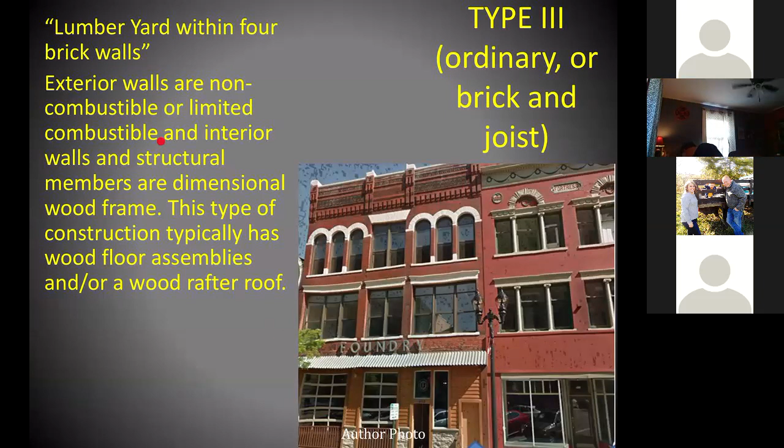So what is a type 3? Basically, we call it ordinary construction. It's a lumber yard within 4 brick walls. We'll talk a little bit about how to identify what is truly type 3 and what might be wood frame type 5 with just a brick facade. But this is your main street, your downtown building. The exterior walls are non-combustible or limited combustible, and in interior walls, everything else is wood.

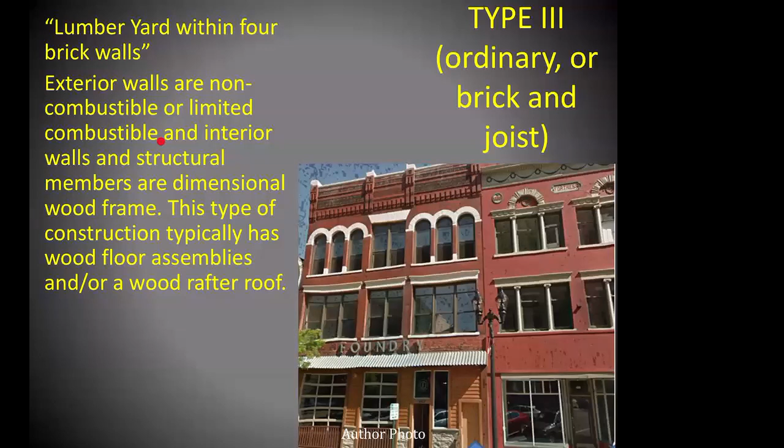And the floors are wood, the rafters are wood, and fires in these buildings. The biggest thing, if you don't remember anything else tonight, I want you to always think about being able to forecast ahead of the fire. It is paramount that you think where the fire will be in 5 minutes, 10 minutes, 15 minutes, because that's where cities fail, fire chiefs fail, command officers fail, and that's when we start burning down blocks of these buildings.

Once again, I have this in every slide presentation I do. 3 books that you need to have: Brannigan's Building Construction for the Fire Service, the 6th edition is now out, Collapse of Burning Buildings by Vinnie Dunn, and The Firefighter's Battle Space by Vinnie Dunn.

3 excellent books that everyone watching this needs to have. Brannigan's Building Construction, this 6th edition, I may have mentioned this in my previous webinar with you guys, but if you didn't see that one, you're new to this one. The 6th edition is broken down by sections. You get yourself some sticky notes and you find out what you have in your town from this book, and you just put those sticky notes in those sections and you read those sections.

If you don't have type 4 heavy timber, then don't read it in Brannigan's Building Construction. Focus on what you have, but this book breaks it down so you can easily go back and review and read. So these 3 books are a must, and they're a must if you want to understand the type 3 ordinary constructed building.

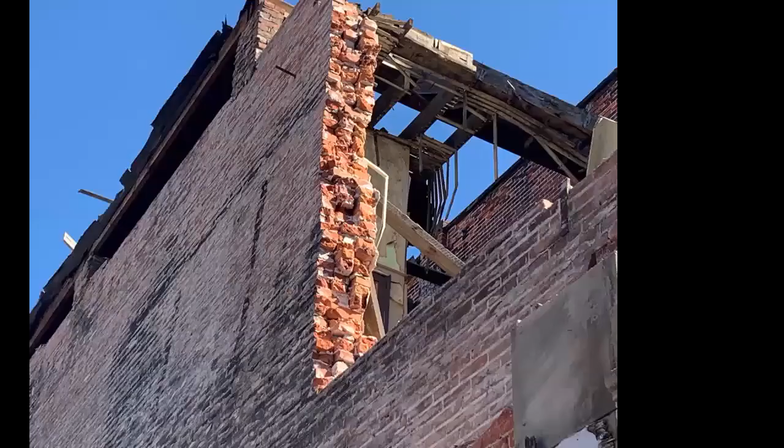Perfect example here. This is a cutout in my town of a building they were tearing down in my downtown. This is a perfect example of the bricks. We'll talk a little bit more about how they are laid out, but this is just I thought was a good picture of what we would call the wythe. That is the rows of bricks that make up these buildings.

Big thing to remember. We are looking at buildings that are 100, 130, 120 years old. They are, and we joke, but it's true, the only thing that's holding up these buildings is gravity. You know, these buildings are 100 years old, but their wood is very substantial because of the lumber that was utilized in these buildings. If you're tuned in and you don't have any type 3, hey, great. And like we talked earlier, you would respond mutual aid to those kind.

But if you protect a rich suburb that is nothing but type 2 buildings, you protect cheap throwaway crap buildings. And that's just the way it is. So my point is that in a type 2 or a wood frame building, type 5 with trusses and modern furnished materials, they're going to collapse. Your fire ground commanders and firefighters and officers, you pretty much go into that mindset that if we can't lick this thing in the first couple minutes and it's a one-line fire, if it gets beyond that, we're backing out, we're throwing big streams, and the thing collapses.

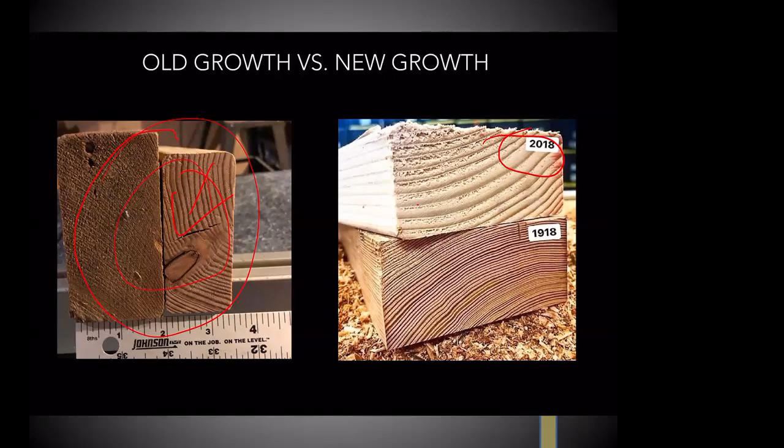You have to understand the skeletons that you're going into. It will allow you to work. It will allow you to lay lines and fight fire, what we all want to do. These fires, if you get in on these, are the ones that you all dream of, multiple masks or cylinders. You're working hard, smoke. It's what we all signed up for. But if you don't do it correctly and it gets away from you, then, like I said, you got trouble.

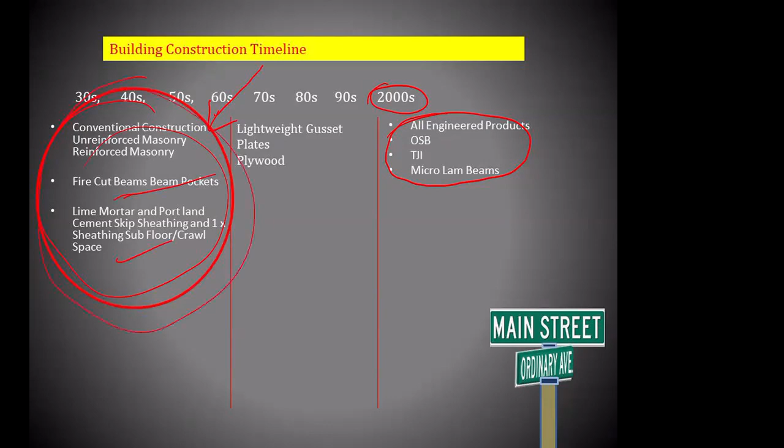So the exterior optics of these type 3 buildings. We're going to talk about 5. There are many things, but I'm going to review, and if it's something new, great. Any of these things that you haven't seen or heard of, share it with your other firefighters, because these are all things that are going to make or break your success on your main street. But we're going to talk about these exterior optics. The year built, block inscription, that tells you a lot.

If Bill Smith builds a Wendy's in your town, and he builds it in 2020, Bill Smith isn't going to put on that Wendy's "Smith 2020." What a lot of these builders, these architects and contractors, or the people that owned the buildings did 100, 120 years ago, at the top of the parapet wall or somewhere on the building, they would put the year it was built. That will tell you a lot about what might be holding up that building, and we'll get into that.

There's one year you need to remember that will really lead you on your way to understand what's holding that up. And again, we'll talk about it. We'll talk about the King's Row and the header rows, how to tell if it's a true masonry building or if it's wood frame with a brick facade. The parapet wall. We'll talk about canopies, awnings, and signs, and fire escapes.

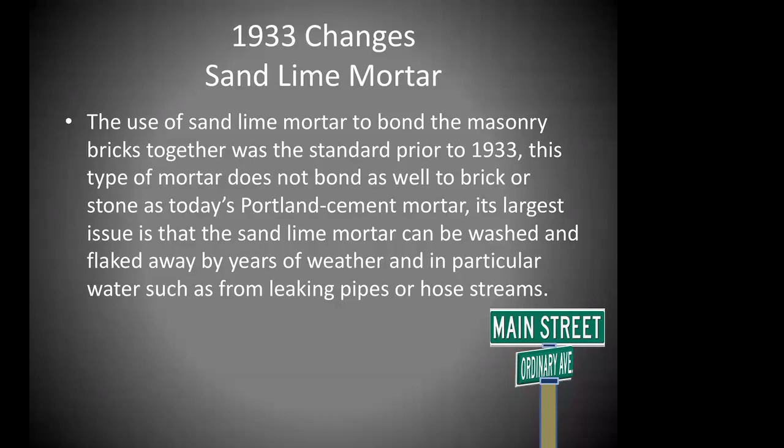So this earthquake went through in '33 and did all this damage. One of the things they found was that the mortar holding the masonry wasn't good enough. So out of that, they came away with a better cement, a bonding agent for the mortar. Here's a good example of a building in my town where we threw an aerial bucket up, and this building was built in the late 1800s.

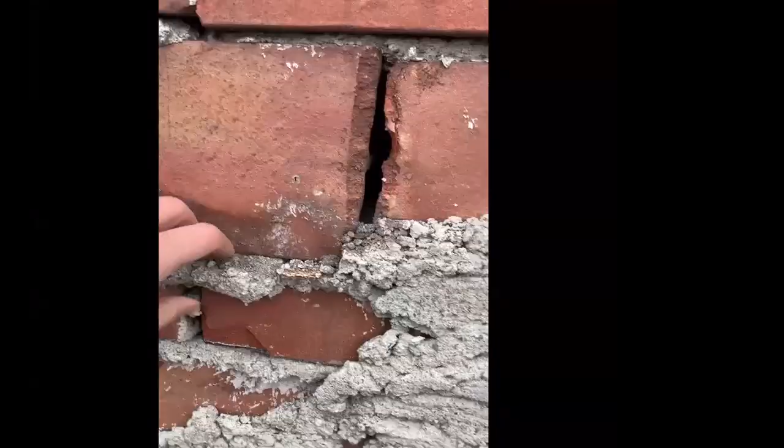Now, don't tell anybody in my town that an assistant chief's going up in a bucket and peeling away mortar. But if I can do that with my hand, what do you think your streams will do? And so, again, 1933, that's the key. This building was built in the late 1800s, sand lime mortar. You're able to pick that clean, the mortar between the bricks.

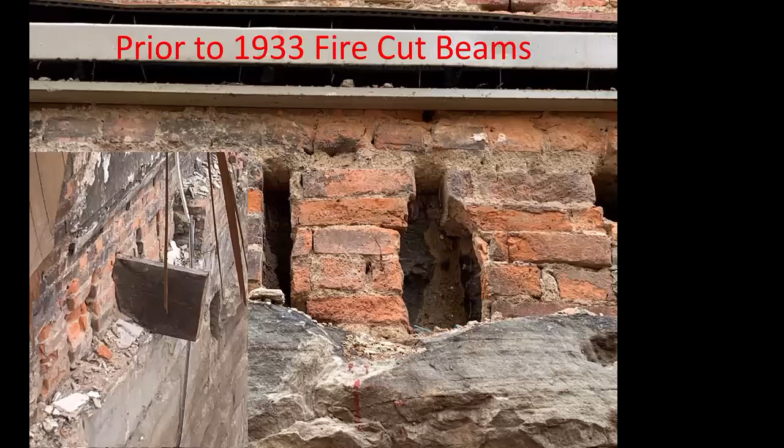Prior to 1933, also, the rafters, fire cut beams. As you can see, these are called lets, and they're just basically a pocket. So when they built these buildings, they would put the rafters on an angle in these. Fire cut beams are designed to release the building inward in the event of a fire.

So fire cut beams were designed so that if you were to have a fire, as you think of the A, B, C, and D sides, the bearing walls for most of your downtown type buildings are going to be Bravo and Delta. And these fire cut beams allowed, prior to '33, that when they would have a conflagration or a fire, these fire cut beams would release and everything would collapse inward.

So it saved the walls. So then basically all they had to do was scrape up the innards and rebuild, and they still had the 4 walls. And so if a building's built before '33, those fire cut beams aren't going away. This was a building that was taken down in my downtown earlier this year, and we got in there and were able to look at some of the lets and the fire cut beams as they were taking it apart.

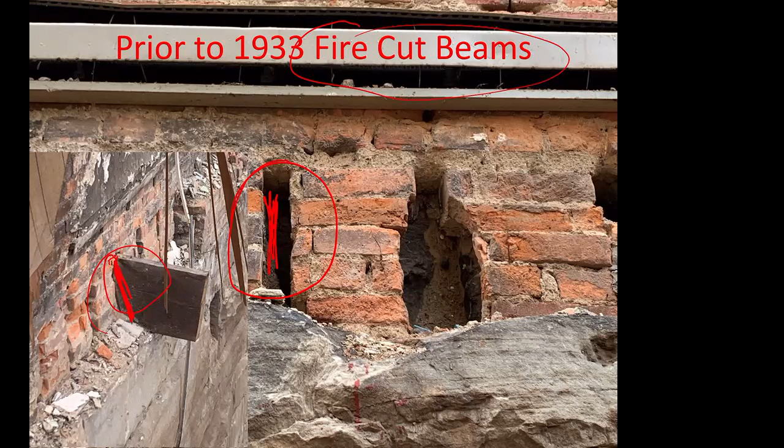The King's Row or Header Row. So I challenge you, when you get a new firefighter, some of you watching this may already know this, that's great. But I challenge you to leave your department better than what you found it. When you have a new firefighter, this 21-year-old kid who just comes on the job, or if you're a young member of the department watching this, I applaud you, but you're trying to learn. Firefighters just don't come on your job and know everything.

You have to take them to these buildings and explain: is this a true brick masonry building, or is this a wood frame building with a brick facade? And you can identify these quickly by the King's row or what's called the header row. When you look at a building, you'll notice that maybe every 6 or 7 rows of brick, you'll see a course turned. In this cutaway, it's turned and it brings the rows or the widths of the bricks together.

Remember, these buildings were not built with any kind of rebar. Prior to 1933, there wasn't much rebar used to add support to the brick. They're not using this type of brick to build an O'Reilly's auto parts store in your town. They're using block, a concrete masonry unit or CMU, and probably some rebar. But they didn't have that then. So in order to get the building's walls to adhere, they would have to turn a row.

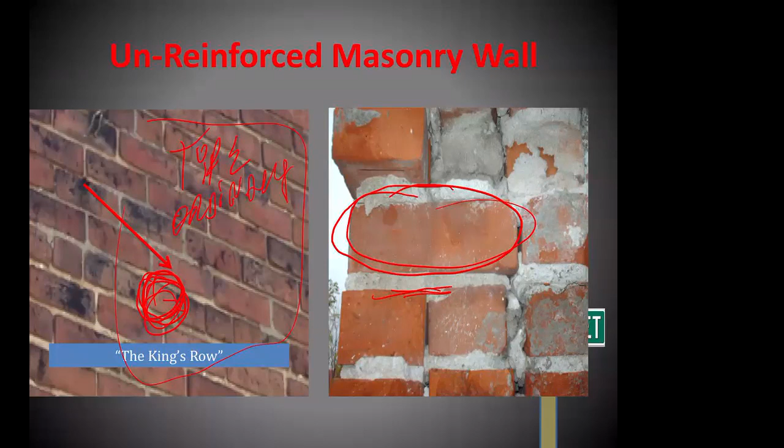So when you see a row turned, that's a very good indication that it's a true type 3 ordinary construction, and you're not going to have a wood wall behind this with just a single row of brick. Now, some people say, well, in my town they're building a building and they're making a header. If you're watching them build a building in 2020 and you see that, it's fake. But if you go downtown to a group of buildings built 100, 120 years ago and you see that, that ain't fake. It's an unreinforced masonry wall, tied in like that, and it's true type 3.

Here's another one in my downtown. There's no header course. This building was built in the late 1870s or 1880s, I believe, and it was just a wood frame building, and they just threw up some brick. So why is that important? Well, if it collapses, we may have a curtain wall type collapse, where it's like you cut a curtain and it just falls to the ground. Again, we can't predict totally how a wall will come down, but you should have a good idea.

If you don't have any courses turned, it's a brick facade over a wood frame building. As things freeze and thaw here over the year, these will expand out, and you can have problems that way too. Not only in these types of buildings, but also in your true Type 3, especially up in our area. My town has a street that is totally blocked off, an alley, because the bricks are falling, not because I went up in an aerial and pulled the mortar off, but the bricks are falling into the alley from an almost 1890 building, and the bricks are starting to fall off.

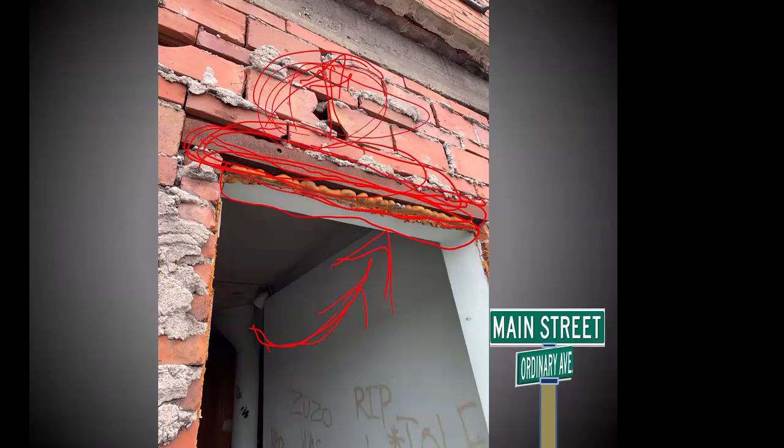Fire comes blowing out of these windows. It's heating up that metal. And we all know that metal is going to turn and twist and elongate. There's nothing else holding up these bricks above. So when you have heavy fire conditions blowing out a window in these buildings for a long period of time, always remember that you probably have a metal lintel above that is going to twist and turn and could bring down those bricks. Just something else to think about in your downtown.

The parapet wall. What is it hiding? Here's another thing about the parapet wall. Prior to 1933, before that earthquake, you could build a parapet as high as you wanted. It didn't matter. Here's a good example. This building was built in my downtown in the late 1800s, and this parapet wall, it's kind of hard to see, it's ginormous. It goes as high as you want it. After '33, there were some parameters put on the height of the wall. So if you have real high parapet walls, you could pretty much guess that that's a pre-1933 building.

Another thing that comes with these is that if they don't put any kind of coating, wainscoting, or coverage to protect these bricks, wind, rain, freezing temperatures, freeze-thaw periods, there's nothing protecting these bricks. If they don't do that on the parapet wall, so this was a good example that I had, I took one of my firemen up on one of my downtown buildings. Here you have this protected, that's great. But where it's not protected, he's able to pull that brick right on out of that parapet.

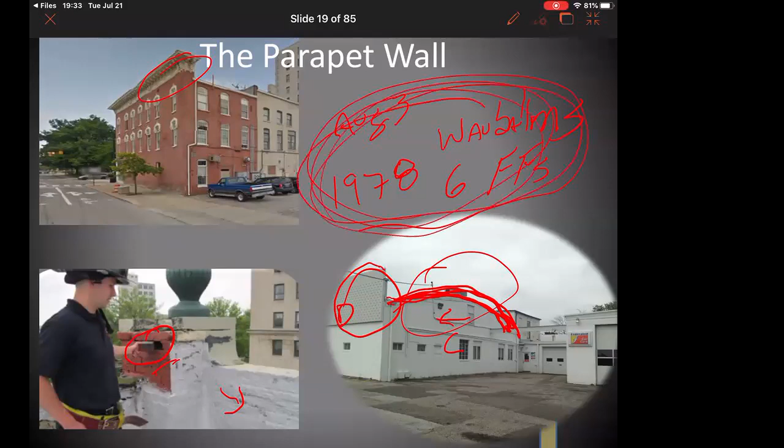If you're unfamiliar and want more info, write this down on your phones: 1978, we're coming up on the anniversary, August 3rd, Waldbaum's, New York City. I'm not a good speller - Waldbaum's supermarket. Killed 6 firefighters. Bowstring truss, another thing called a rain roof, which we'll talk about. But if you're unfamiliar, 1978, Waldbaum's fire, New York City. It's an event that we should all know about and know the lessons.

Parapet wall collapse. Guys and gals listening to this, watching this, brothers and sisters, I can't overemphasize - when I study these fires, and again, I study them all over the country, one of the things is because we do bread and butter house fires, we're not used to parapet walls and their collapse. The parapet wall is the most unstable wall of these buildings.

A parapet wall is the wall that just extends out above the roof line, if you would, on either the front or back or all 4 sides. It's exposed on the back side, but these buildings will all have some sort of parapet wall. And again, based on that 1933 date, you'll know how high or how low they are. They can collapse very quickly, and we'll talk about how they collapse here in a second. If you're underneath that, you're gonna get hurt.

Most parapets, just like that lintel above a window, you're going to have an I-beam that supports the parapet. We all know when that metal heats, it expands. If you have heavy fire conditions, this is going to heat up and expand, and it's going to bring down the parapet wall. Plus, if this backside is unprotected - there's no wainscoting, no covering, no protective covering - you just have masonry brick, over time, freezing and thawing, and this is going to expand. If it's built before 1933, you're going to have that sand lime mortar, and this will be the first thing that's coming down on top of your head.

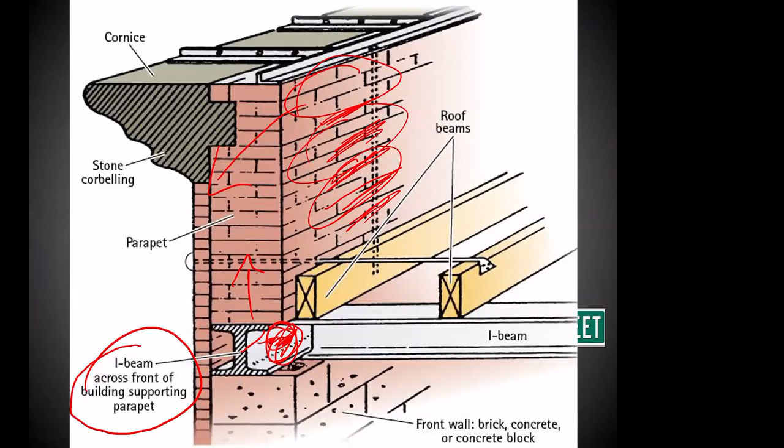Here's a fire that took place last year or earlier this year in Indianapolis. A 1-story building. Now again, this was a perfect example - that heat just twists that, and that parapet's coming down. Let me see if I can get that in slow motion.

Another good example - this was a fire that took place in Massachusetts, Fall River. We have a 1-story building, and you have this facade and this parapet wall. When you have a 1-story building, you will for sure have some sort of I-beam that runs this way to hold this up. You have these showroom windows, and with heavy fire conditions or any kind of fire in any void space above, in the drops above the drop ceiling, it's going to heat up and come down, which is what happened here. This is that building.

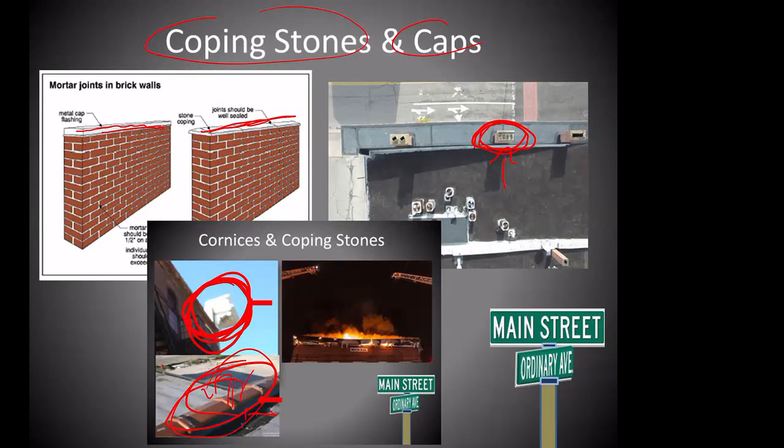More hazards: cornices. That is nothing but hollow wood in a lot of buildings. They're very elaborate, but all it is is one more area for fire travel. How do you know? Well, you've got to get up and look at them.

Again, not much holding these on. You can see this building was built in 1895. Here's another shot of one of my buildings—you can see the deterioration. This is the alley they blocked off below this, but you can see a lot of the masonry and mortar has been washed away from this cornice. Another shot of a cornice just showing how hollow these are. Nothing holding them up, a lot of fire travel, and that can just peel off on top of your head.

Fire escapes. The people living in this building in my town wish this was cannabis and not ivy. But fire escapes are one of the last things that a landlord will fix. They cost a lot of money.

State of Ohio, and probably most states, if you can't take the fire escape off—if you take a fire escape off, you've got to put one on. So these are expensive, and they're one of the last things a landlord will fix. Well, you need to get out and look at these, because if they're not fixing them, are you going to trust your people on them?

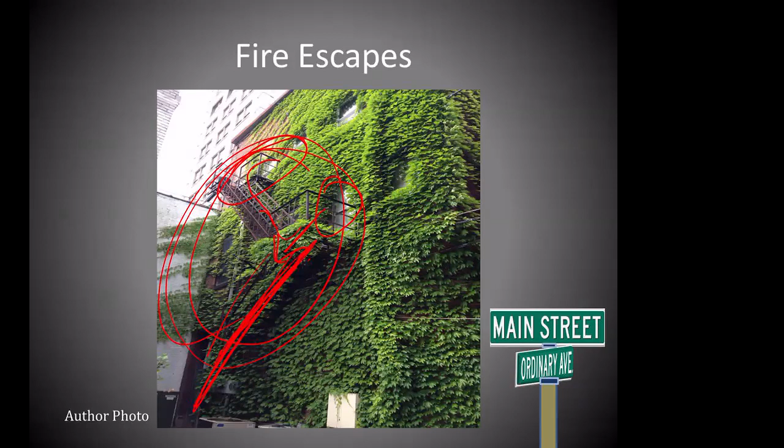A good example of a failure of one: this picture won a Pulitzer or something in the photography world of newspapers. In 1975, you can see this firefighter—they put the aerial up. He has mom, and mom has the child. This collapsed, and he was able to grab onto the aerial, but the mother passed away, and the child survived because she fell on top of her mother. Just a tragedy, but a good example of fire escapes and their failure.

All right, we're going to go inside now. What do you have above? Do you have a bar? Do you have single room occupancies? The fire—if anybody here is from Lima Fire, the fire you had in your downtown a month or so ago—I understand there was concern about homeless people living in there. I want to talk about that fire a little later, but what do you have?

I've got some single room occupancies, junk, a collection of just stuff, a bar. What do you have in your downtown buildings now? I guarantee you when these were built, it was for hardware stores, florist shops, everything. Over time, it wasn't made to be maybe a florist on the first floor with a dentist or lawyer's offices above. Well, now it's a dollar store full of plastics on the first floor, and the second and third floors are vacant. You have to identify what you have, and you have to get into these buildings yearly.

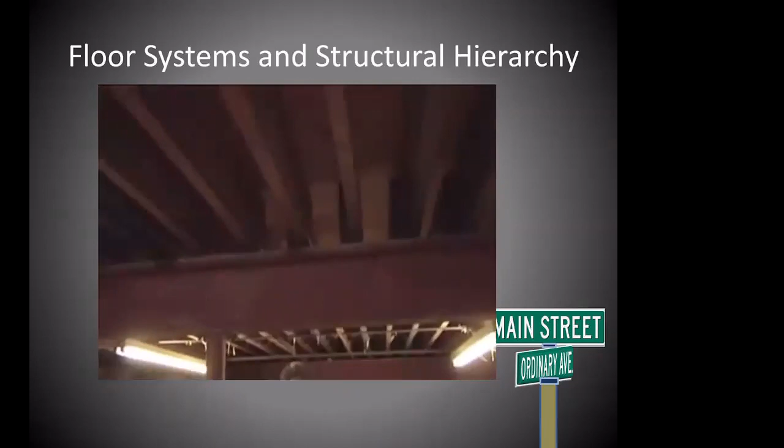Back to our column: if our column were to fail, it would result in the loss of support to the beam. The beam may also fail, dropping the floor joists which are supported by the beam, resulting in a large area of collapse.

If this column line runs vertically through the building and supports subsequent floors and the roof, the loss of a column in a basement or lower level will result in a vertical collapse sequence through the building to the floors above and to the roof, resulting not only in a large horizontal collapse zone, but a collapse zone that encompasses all floors of the building above the failed column.

The building we're in is an old supermarket. The portion we're standing in was constructed in the 1970s. Notice the floor joists are large dimensional lumber, actually 3x12 floor joists. They've been constructed in a manner designed to support a heavy load above, and the joists are 12 inches on center compared to the normal framing standard of 16 inches on center.

What that does is allow for a greater load. For the fire service, that means there's more meat in the floor joist, which translates to greater burn time. The fact that the joists are 12 inches on center also builds redundancy into the floor system. We could have a localized area of collapse or damage to several joists, but because the joists are redundant, one will help take up the load of the adjoining joists should they fail.

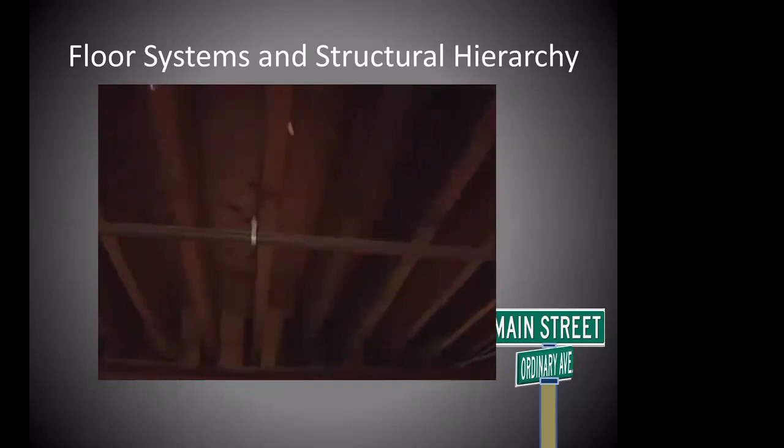Another collapse potential in this building is burn through of the floor decking. What we see when we look up between...

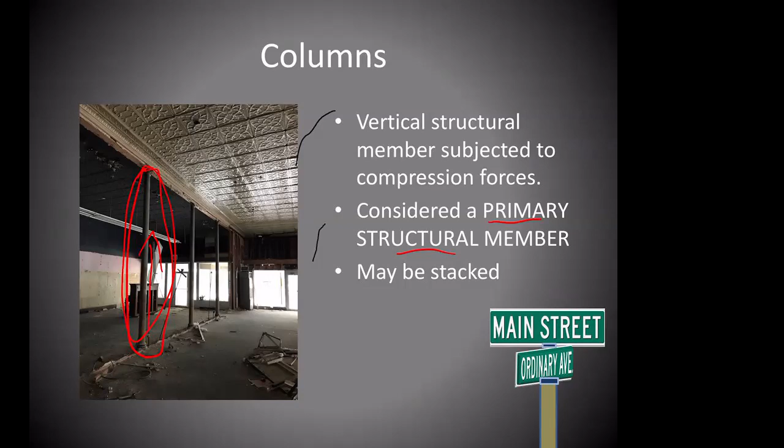So he talks about columns. They're going to be stacked—they're a primary structural member. How are they protected in your buildings? A lot of times they may be boxed in. If they are, that's great, but it also creates a channel for fire, another void. You need to see how your columns are. Good example of different types of columns.

How do they react in compression, their strength as far as buckling and shear. One of the things we'll talk about—this slide is kind of out of sequence, I apologize—but cast iron.

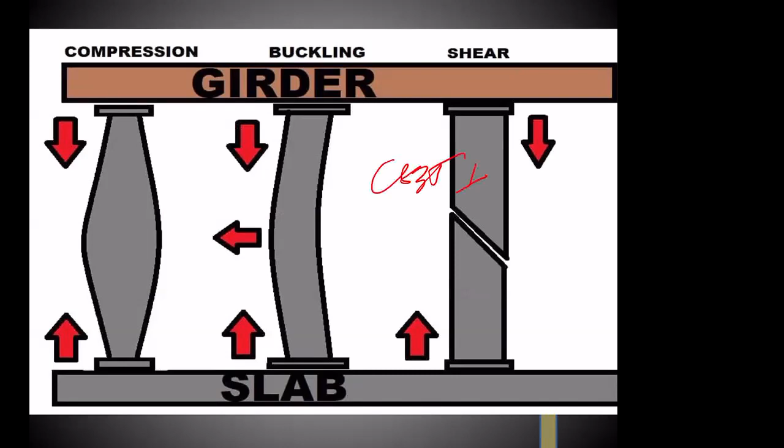Cast iron was very popular after the Civil War until the early 1900s. So if you have a building downtown built in the late 1800s, chances are it's going to have cast iron. What makes cast iron so bad—some say it's brittle, or that applying water makes it shatter. No, it doesn't have the same kind of shear strength. It's very good in compression, but any kind of shifting will cause that cast iron to move. That's the true issue with cast iron.

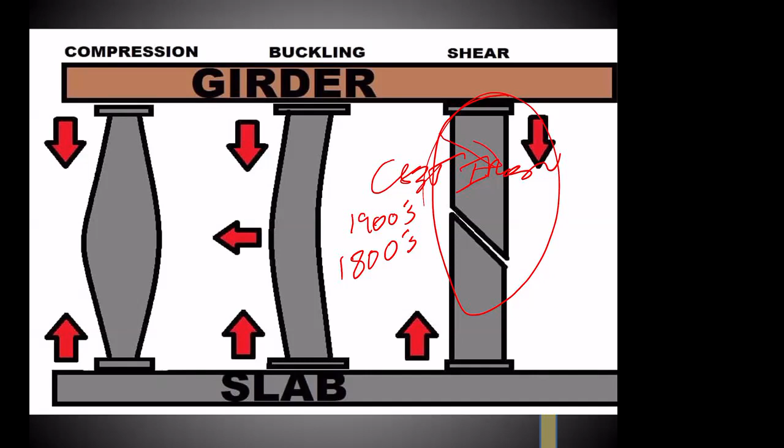Plus one other thing I'll show you here—right there is how thin it could be. This is from, I believe, Lex Shady, who sent this in about how thin cast iron is, so I want to thank her for this. You can see how thin that is.

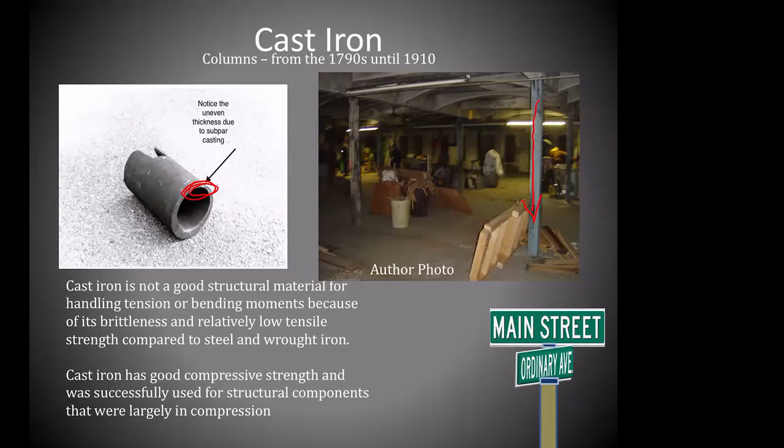Again, in compression this is good, but because it's so thin, any kind of shear could bring down that column. Cast iron dates from the 1790s to 1910—boy, if you've got a building that far back, God bless you. But if you have anything standing from after the Civil War, you may have some cast iron.

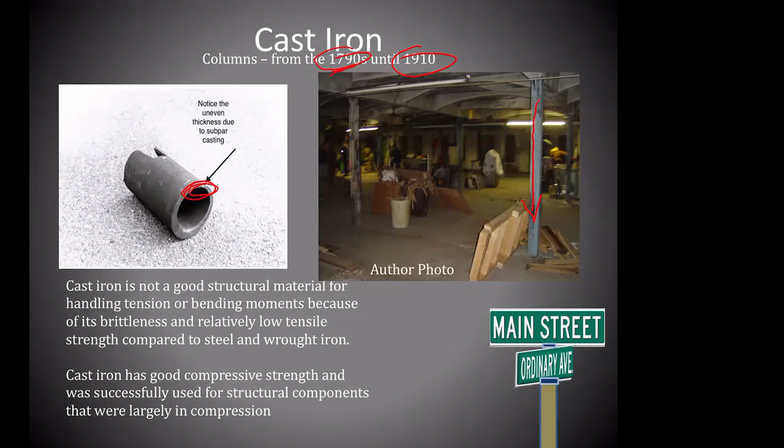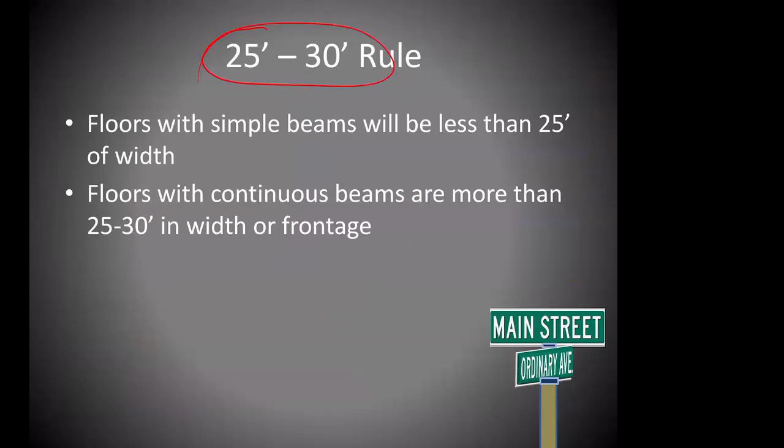The 25-30 rule—a very simple thing to always keep in mind. You see a column that's 25 feet.

Sorry about that, I got a guy sending me cool fire pictures.

25 feet—so if you look all the way across, you can pretty much tell. That's a safety thing too, as you're moving in with hose lengths or whatever, because they couldn't have these long rafters—they needed to put a column in to support the load. They couldn't just make one giant rafter. This was before the days of trusses. That's why when you go to Walmart, where trusses came into play, you could have these wide open spaces. You couldn't do that in the late 1800s or early 1900s.

They were limited, so they would put a column in every 25 or 30 feet. This gives you a good idea of how long or wide a building is. Give it a shot—grab a tape measure, go out there, look at your columns in these buildings, measure off and see. It's a good rule of thumb.

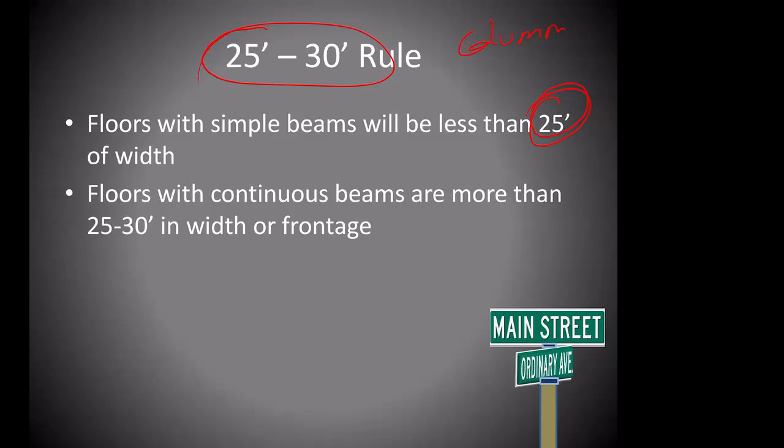Are your joists exposed or covered? If they're open, they have very little time. This is one NFPA item to consider: open joist type 3, 200 and 211. The first number is the hour fire resistance of the exterior walls—so 2 hours on that masonry. The columns, if open, you've got nothing; if covered, you've got an hour. Same with the interior walls—if covered, you've got an hour.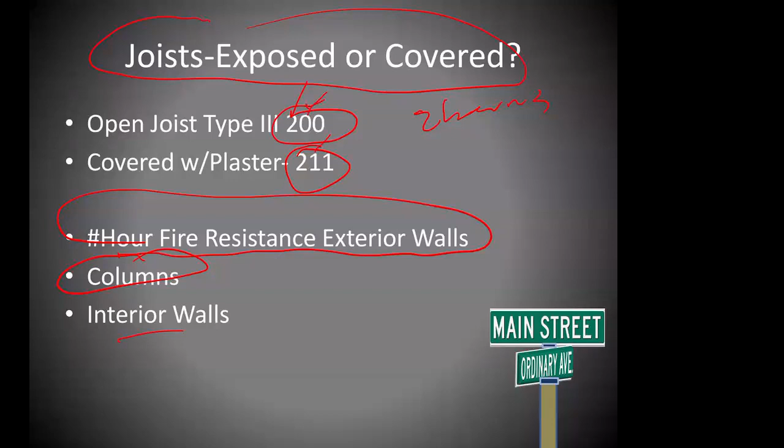Most basements, wide open, uncovered. All right, not much time. Inside walls, this is what is going to get us and why we lose blocks. You can go into a house fire and you can pull walls until your heart's content. Open them up, chasing fire. Everybody's excited, working, blah, blah, blah.

Okay. You get into your main street and you go, we got to open this wall up. Okay. Give that a couple, I don't care how many giant tires you flip or how strong you might be. In a smoke condition with SCBAs, these are going to wear out crews trying to open up. Very difficult. So you have to remind your crews that they're not opening up drywall that they would have in a normal house fire, or even lath and plaster of a residential dwelling.

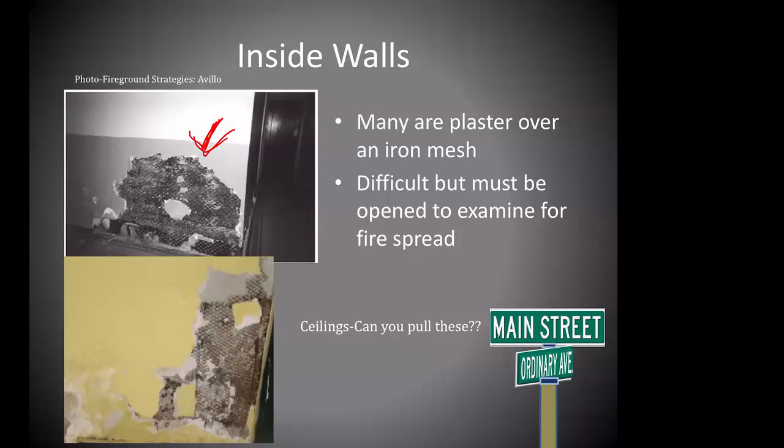Hopefully, if you have lath and plaster in these ordinary type 3 buildings, great. But some, you may have this plaster with that mesh. It's going to be difficult. We'll talk about ceilings here in a second. Excuse me.

We're going to get into basements, but a lot of buildings, when you see this, drugstores. A lot of drugstores, this building ain't a drugstore. If you still got a drugstore that's been in your downtown for 100 years, I want to meet those owners and know how they've stayed in business.

But if you know that a building housed a drugstore, the flooring may be terrazzo. And terrazzo is basically these polished pieces of marble and cement laid over wood. Very common in drugstores. Insulates fire below very well. And we'll talk about an event.

Have you looked at those with a thermal imager? Yeah, you're not going to be able to. Forget it. Is there a reflection? No, I don't believe there's a reflection, but you will not see anything.

Zero. So if you have a drugstore, and not just drugstores, churches, that should raise a flag. Drugstores were very prominent on main streets many moons ago. The flooring hasn't really gone anywhere. So just check that out. Now we have all kinds of products, things that this building was not meant to house. And so you have to look in your interiors on what you have, what kind of products you have.

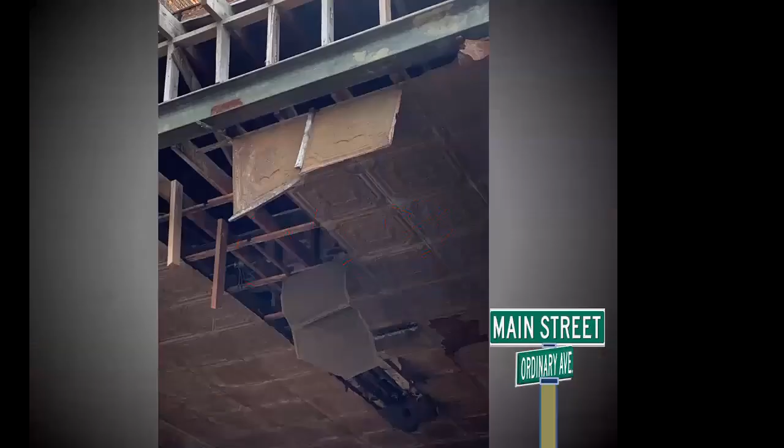Tin ceilings. Another interior item that if any of you have studied for a promotional exam, I've studied for promotional exams, I've taken a ton of them. And one of the things it says in a very popular textbook, John Norman's Fire Officer's Handbook of Tactics or Avillo's Fireground Strategies, they talk about how to open a tin ceiling. You know what? Good luck. God bless you. In those cities that they worked in and they wrote, you got 30 to 40 to 50 firemen pulling.

Don't think that a crew of 3 going in to check for fire is going to be able to pull a tin ceiling. Find another avenue, but you can forget being effective at pulling a tin ceiling if you don't have the staffing. If you do, hey, go for it. But I don't know, let's say again in Lima, how many firefighters they can get on scene in a downtown building fire within the first half hour. But in my town, you're not going to get the same as what you would get in FDNY or where Avillo was at in Jersey.

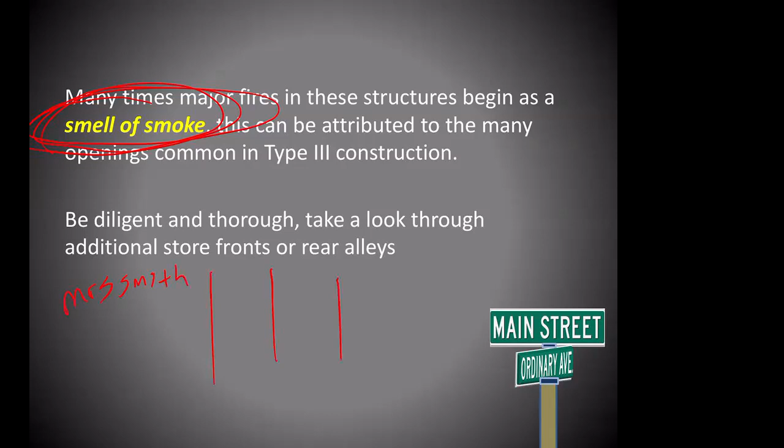And you go, and you see Mrs. Smith, and you go, yeah, it smells a little bit, but we can't find anything. And we checked with our fancy thermal imager, and you're okay, Mrs. Smith. If it gets worse, call us back. Well, as you return, turn the corners, drive down the block, take a look in the windows and see. I'm not saying you got to force every door in the block, but take a look, because let's say Mrs. Smith is here. And you got a basement cooking down the block. She'll smell it because of the voids. We'll talk through basements here in a second.

So be diligent. This bit us a long time ago in the city of Elyria. But when you have a smell and you're going home, tell your driver, you know what, let's go down the alley. Let's turn around and just take a drive back. Turn on those fancy quartz lights on the side of your pumper and shine up the building. And you might see something. You might pick something up.

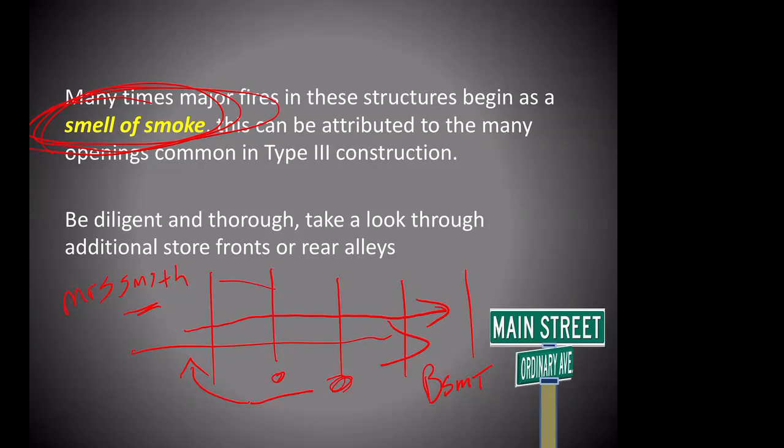Potty problems. You got fires in these bathrooms, red flag. Or you're going in to look in these bathrooms. Rotten wood. The chases are going to be exposed. You might have large bathtubs, if these were made as apartments 100 years ago. You might have a lot of old cast iron. Today apartments are built, think about how many multi-story buildings you have. They're probably just garden apartments, okay? And everything is stacked. Well, that's PVC pipe. They're made with PVC because that way they're not going to rot, they're not going to have a hole in there per se, and you don't have to have as much maintenance.

When you build a building in the 1800s, early 1900s, and it's 3 floors, you're going to have cast iron plumbing, and let's say they have a hole in it. So they go in, they patch it, and make more voids. Just something to think about. Be cautious when you're working in the potties. Don't stack 100 people in a bathroom in one of these buildings checking for fire.

Basements. If you're still with me, and I hope it's not just me talking, but if you're still with me, basements. Listen, think about this.

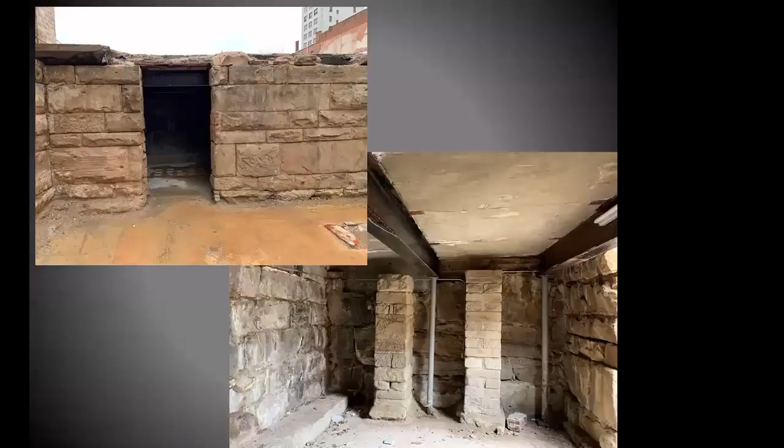A lot of these downtown buildings will go underneath the sidewalk. So in my town, they tore this down earlier this month. I was able to get in there, and this is coming in from the basement, but you got a whole room here. So if you look in your downtowns, you start walking towards the A side, you may find a door or doorway that's getting out underneath the street. Just something else to look for.

Okay. Another item that will help you vent and get water. It's called a showroom bump out. These buildings were built as a store, okay, mercantile. Every Christmas, there's that movie, Red Ryder BB Gun, A Christmas Story. They all got their faces pressed against the showroom window. Okay, when they built these, the showrooms were built not for the weight of people, but for maybe a mannequin or clothing or what they sold. Flimsy wood, like a stage.

You might have very good access directly into your basement through the showroom bump out. So you would be able to take these windows and possibly, the only way you'll know is getting inside and getting down into these buildings. But if you go down and get into these buildings and you walk towards the A side, look up. And if you see a change in grade in that floor to where it's flat and then it maybe goes up a little bit, the showroom bump out. That's easy access. It's flimsy because it wasn't designed for people to walk on. You might have good access. Showroom bump out.

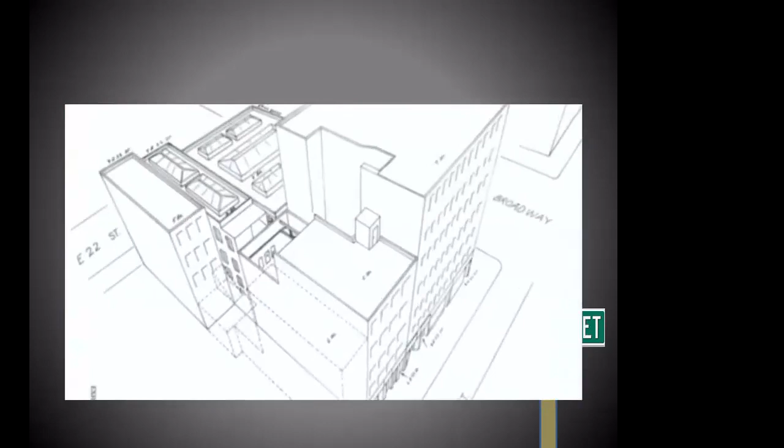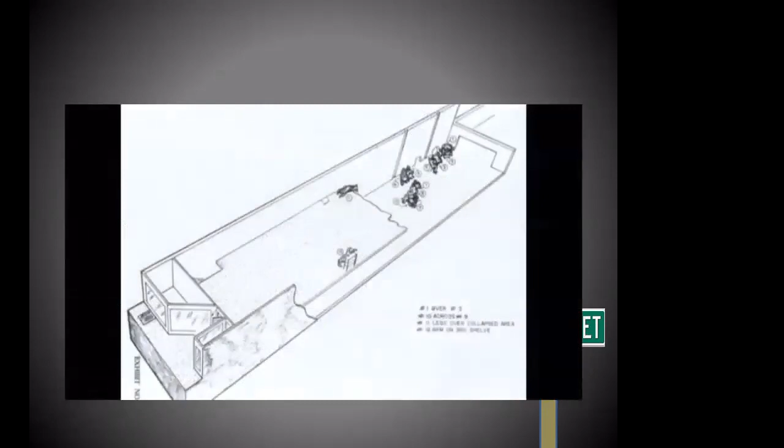What happened was the man who owned the building on 22nd Street was an art dealer. He had drums of lacquer and thinner down in the basement. Business was very good, so they knocked down the original bearing wall that was in the middle between the two buildings and extended a new brick cinder block bearing wall 35 feet into the cellar of the building on 23rd Street. So when the fire occurred down there, it destroyed the wooden beams of the building on 23rd Street.

When Chief Reilly and Jack Finley and Joe Priore and 18 Engine and 7 Truck went in to check the smoke around the baseboard that the fire patrolman told them about, they actually went in past the new dividing cinder block wall and were now standing on a terrazzo floor.

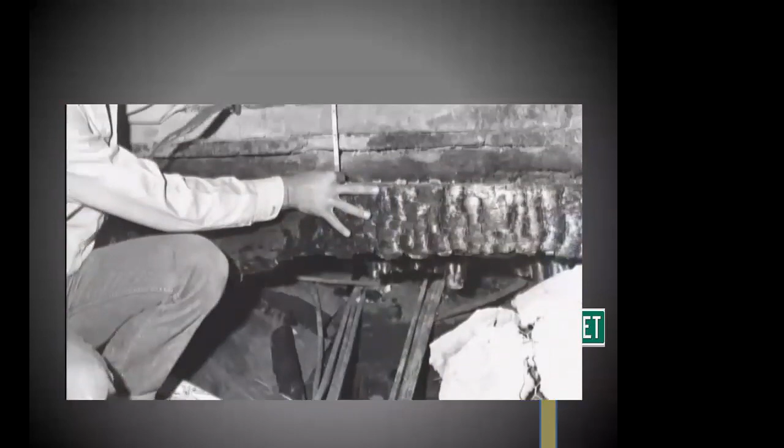Terrazzo is polished marble chips set in the floor. So you had 5 inches of concrete, and what the terrazzo floor did was conceal the weakness of the floor and insulate the heat of the fire. So they could not sense the heat through the concrete, and they could not sense the weakness of the burned away wooden floor beams.

And when I saw the terrazzo floor collapse, which is very unusual, it was a chunk of floor that just went into the basement, crushed those drums of varnish and lacquer, and created a flammable gas ball of fire that roared out through the Wonder Drugstore.

Well, first of all, you had so much water. We had the super pump operating, and we had even 2.5-inch hose lines running for hours. So those basements were filled with water. When you go through one building, it's at least 8 to 12 inches of brick, then you've got to go through the foundation wall of the adjoining building, another 8 to 12 inches of brick.

So they would hoist up the jackhammer to try to take it off. You'd have to jackhammer your way through some bricks, and then they'd come in with the battering ram and try to expand the hole. It was a labor-intensive, long period of time.

And then, I was not down there, but when they got through that opening, they had to go in and find those bodies, what was left of them.

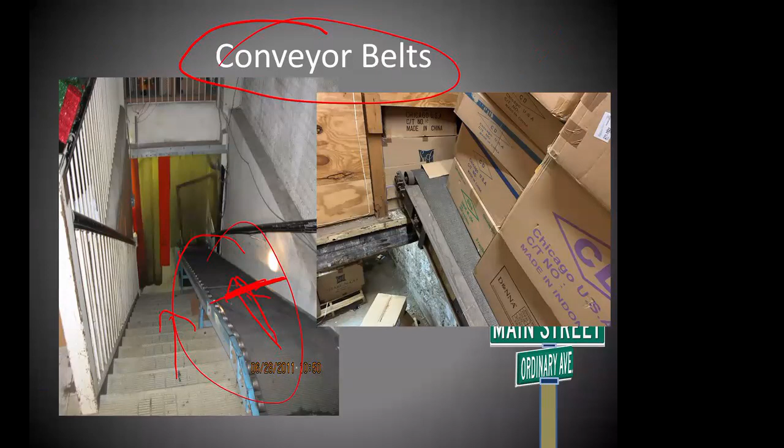All right, we're going to move from basements. One more thing about basements that I want to talk to you about real quick. That's a safety item. Regardless, when you go to a basement fire in a residential dwelling, it's all about construction and everything, but in a commercial building, even on a smell of smoke or anything, anytime you send people down into the basement, leave somebody at the top of the steps.

One of the things that Vinny Dunn talks about in his story of the 23rd Street fire really saved so many firefighters' lives, because it's what led Vinny Dunn, that gentleman you started talking about, to write all his books and magazine articles and become the icon that he is. It drove him because they just did not understand how they could lose so many firemen.

One of the things he talks about in that 23rd Street fire was there was an officer who had left. Back then, here's the thing, all of us have radios now. Everybody goes downstairs because it's safe, you know, safety while everybody's got a radio. Well, back then, they didn't have radios, and so they would leave a guy at the top of the steps.

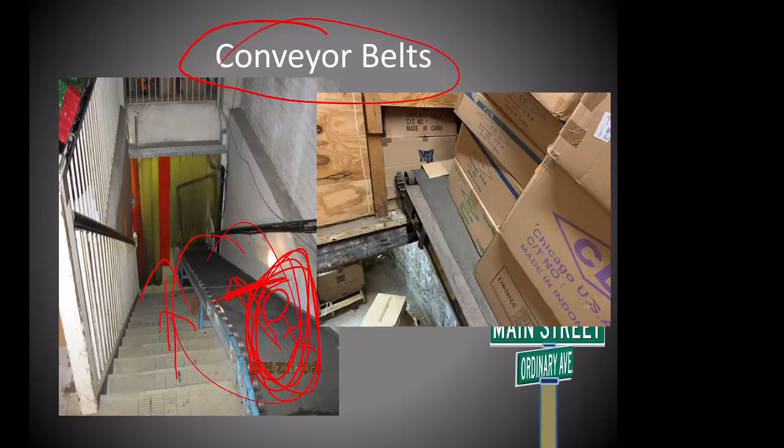In the drugstore, this was the drugstore stairs, the officer had a great name, Royal Fox. He left a member at the top of the steps. When the back of the drugstore started to collapse, he started yelling for the crew to get out, get out, get out. They would have lost an engine and a ladder company down there, about 12 people. If he wouldn't have yelled for them, and if he wouldn't have stayed at the top of the stairs, they would have been trapped and wouldn't have been able to get out. They barely got out, but they got out.

That lesson from over 54 years ago still stands true today. You go into a commercial basement, even on a smell of smoke, leave somebody at the top of the steps. I learned it from this event, and I will always leave somebody at the top of the steps, or now that I'm a chief, I will say, make sure you keep somebody at the top of the steps, especially in a commercial building.

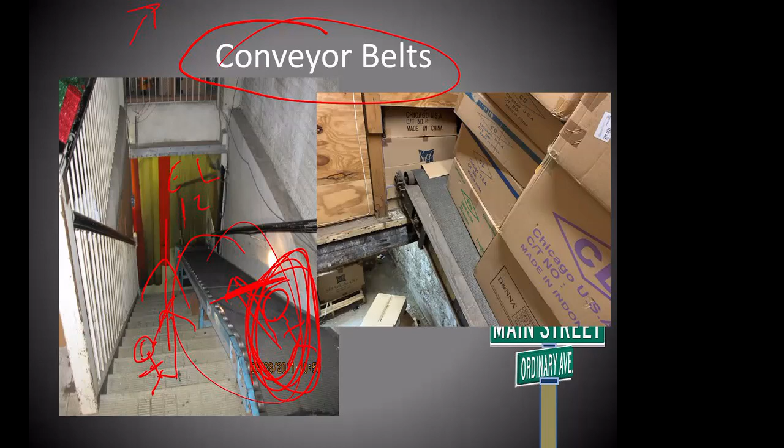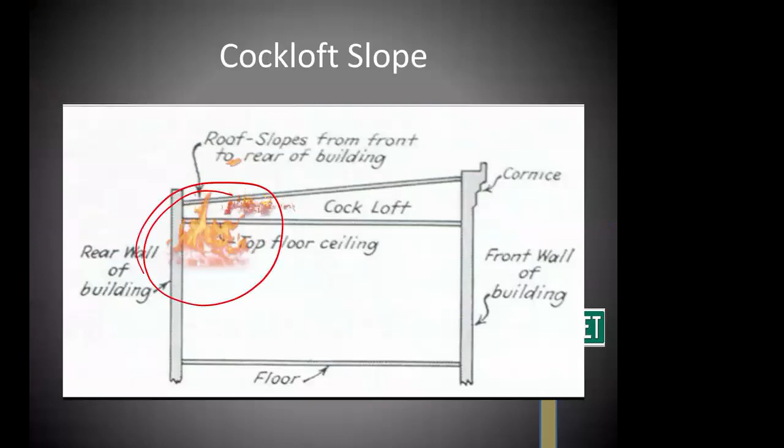For water runoff. Well, why is that important? Here's another little key to think about. A fire in the rear is always going to be worse off than a fire in the front, because a fire in the rear has got a lot more cockloft space to get air and to move. So if you have a fire in the rear and it's extending up, that's a bad thing. Whereas if it's in the front, it doesn't have as much room, okay? But it's got all this room and air because of the slope. So always think of that, just something else to think about.

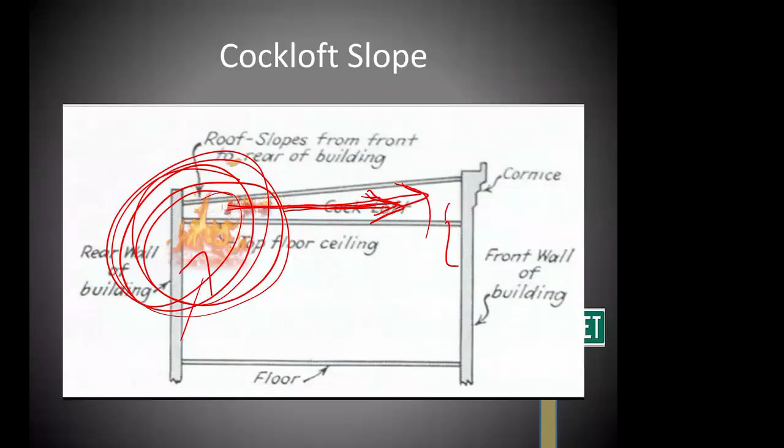Main Street roofs, shafts and atriums. Remember what I said earlier, incandescent lighting was all they had. No fluorescent lights. These buildings were all attached, so they needed to get light into the building. A lot of times you'll have a shaft above a stairway because people needed to be able to see walking up and down the stairs, and then also against the wall of an adjacent building.

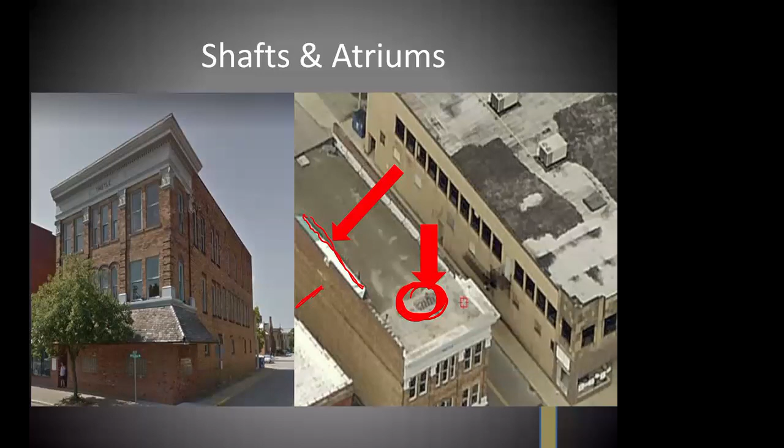We don't have a lot of time to go into this, but this was a mutual aid fire in the town of Lorain, next door to me in Lorain County. They had a heavy smoke condition. The fire, this was a 3-story ordinary constructed building, empty second floor, empty third floor. The first floor was a flop house, with individual little rooms and then a common area.

Fire started in this common area. This is the A side door. But you think, well, fire's already through the roof. No, the shaft and the atrium were doing what they were supposed to do, because you don't see any problems here and here. That fire was going right up.

What this fire taught me is always get a roof report. Now, I'm a fan of roof reports on any kind of commercial building, even on a type 2. Yes, I know they'll collapse, but I have an aerial with a bucket on it, and I can get recon. I can get an officer in that bucket and give me a shot of that roof, tell me what's going on. These downtown buildings, these roofs are substantial. If you want to get somebody in a bucket to look, great, but you can get people on this roof to give you a roof report. Is the fire coming through the roof, or is it coming out shafts like it's supposed to? Get a roof report.

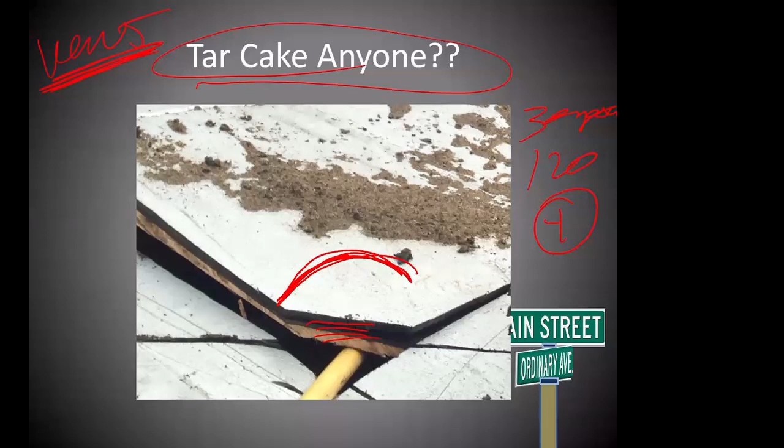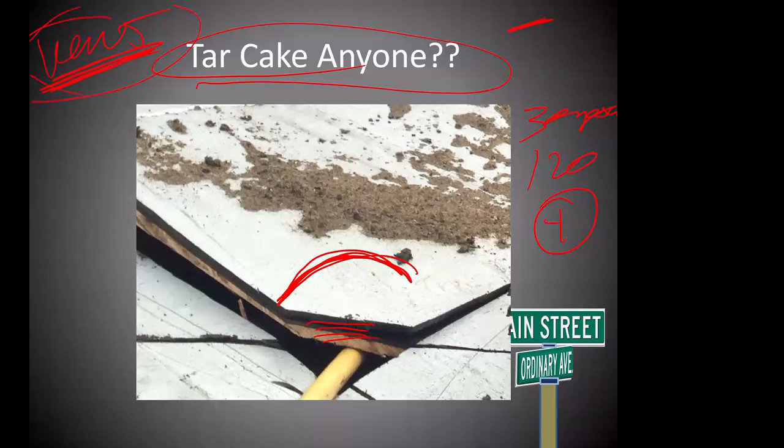2 saws are going to be a must. Can they do it with that tar cake? You're going to have that cake, well, you need 2 saws. These are going to bind up. We had the ability to practice on a vacant one day, and these are going to bind up. So if you're called mutual aid to another city and they say get up there and cut a hole in the roof, bring 2 saws. Most aerials today, most truck companies, or even if you don't have a truck company, a lot of fire departments carry 2, and don't forget about a chainsaw.

If you have two K12 cutoff saws on your rig, many keep one for forcible entry and one with a carbide blade for wood cutting. Make sure you have extra carbides so you can change that blade on the forcible entry saw and bring both saws to the roof. Are you trained well enough to change blades quickly so you have two good K12s on the roof? You're going to run into problems if not.

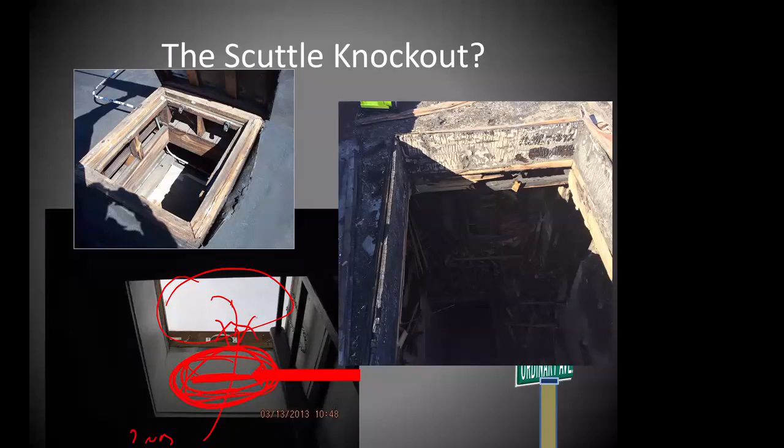Or if you just have a second floor fire and you don't want it to get into the cock loft, and you just want to vent that mattress fire or whatever, you want to make sure you don't bring anything into the cock loft by taking these. So you have to decide why you're taking these knockouts, or why you want to open not just the scuttle but then the area getting into the cock loft. You have to decide if you want to take it or not.

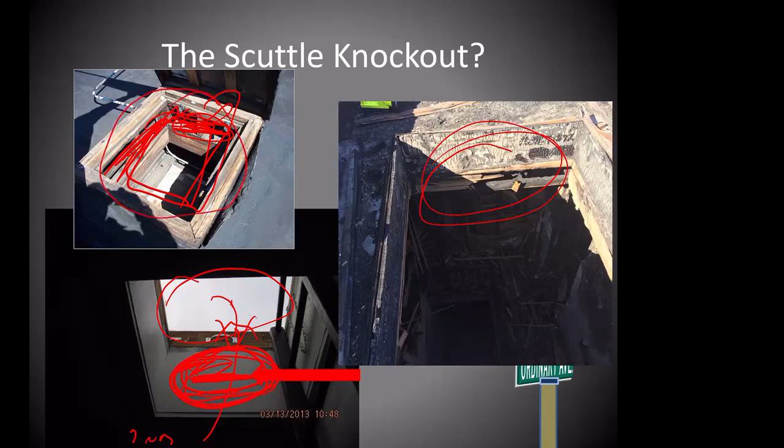But if you want to vent a cock loft, you got to take it. Many a downtown building, I would venture to guess, burned down, and blocks have burned down, because crews have gone up, opened up this scuttle and said, we're done, we got nothing coming out. Well, you got to take these if you're going to vent the cock loft. Another good spot right there, that's the cock loft. You want to vent that cock loft, you take that, you got to open this up. A lot of young firefighters don't know that.

If you have a chief or a boss, and I can speak freely, and I'm going to, if you have a chief or a boss, or you are a chief and a boss and you're watching this, and you're saying, oh, I don't want you guys going into these stores and bothering people because I don't want to get a call from the mayor, that's bullshit. You go into these stores or buildings and say, hi, I'm from the fire department, we're not here inspecting, we just want to walk through. And walk through these buildings.

All right? Or when you see renovations going on, stop. It's our own laziness and complacency that hurt us. And you have to understand the renovations in these buildings. The 23rd Street collapse is a perfect example. Waldbaum's. New York City lost six firemen, and that was twelve years after 23rd Street.